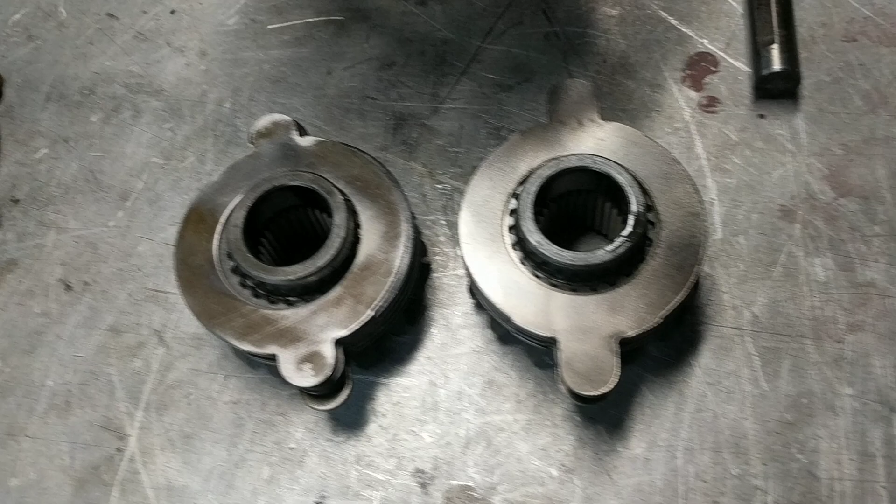Hey guys, I'm doing the 8.8 Traction-Lok for the LTD LX, so I thought I'd show you what I was up to when I first put it together.

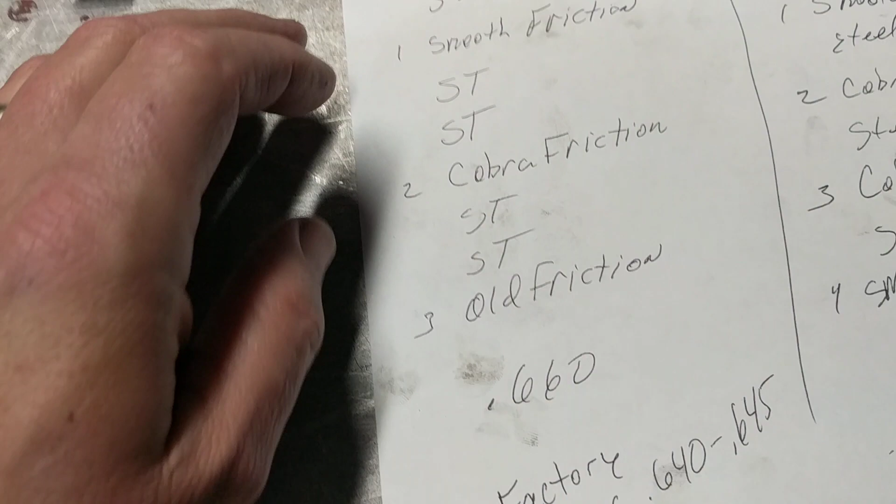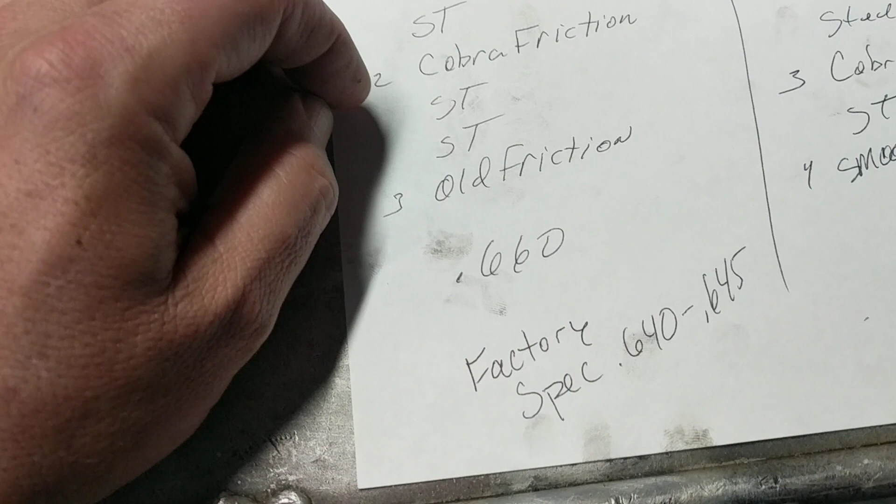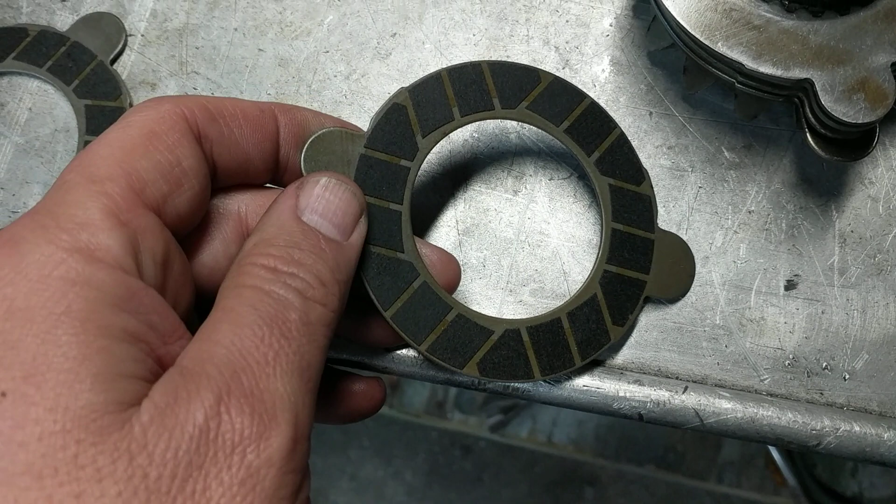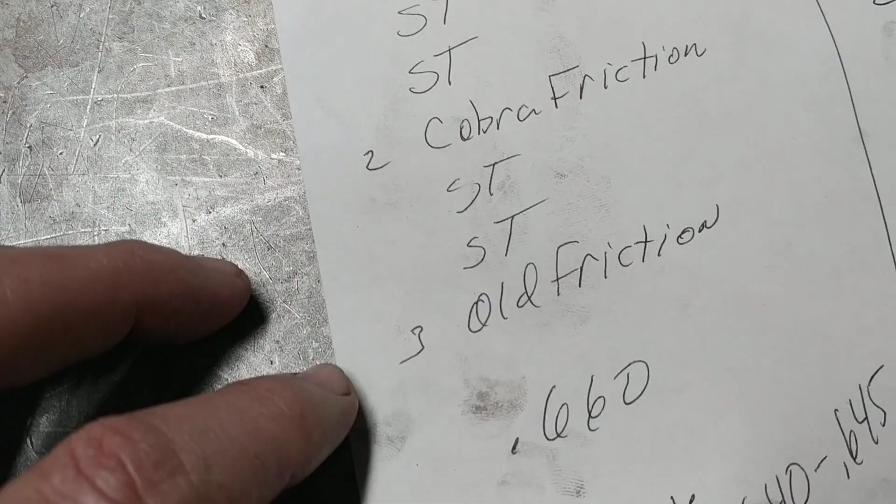I used what I guess is the factory setup, only it's modified. The factory one has got 3 frictions and 4 steels. We got rid of an extra steel and didn't have a shim, using a smooth friction, which is a regular friction plate with all the stuff taken off. Then we had a Cobra friction, an actual setup they called a Cobra Kevlar clutch pack. I've had these forever, sitting in a box, so I figured I'd use them. The other friction was an old friction, which has got a little material left on it, but it's smooth.

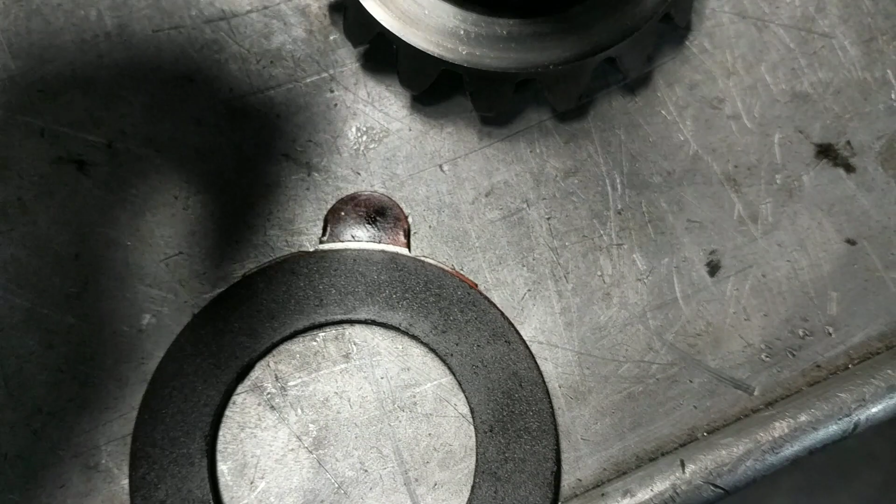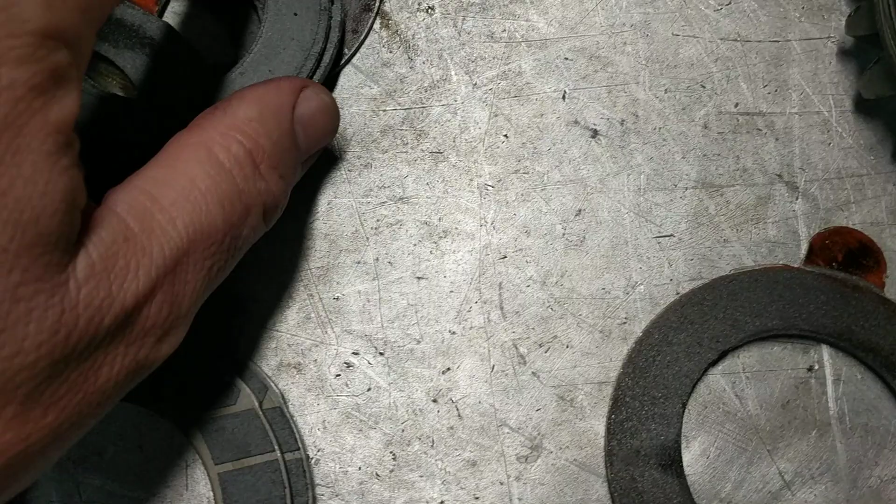I should point out too that if you're going to use one of these, the way they come from the factory, you see that lip right there? That's usually where it rides around the side gear, so it doesn't engage the whole thing. If you do use these, try to trim that off first, because once that wears down, you're gonna have some slop in your pack.

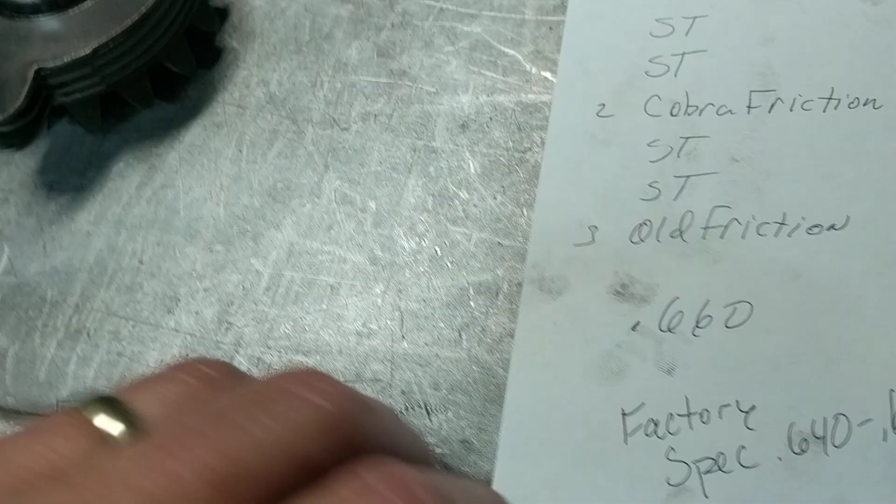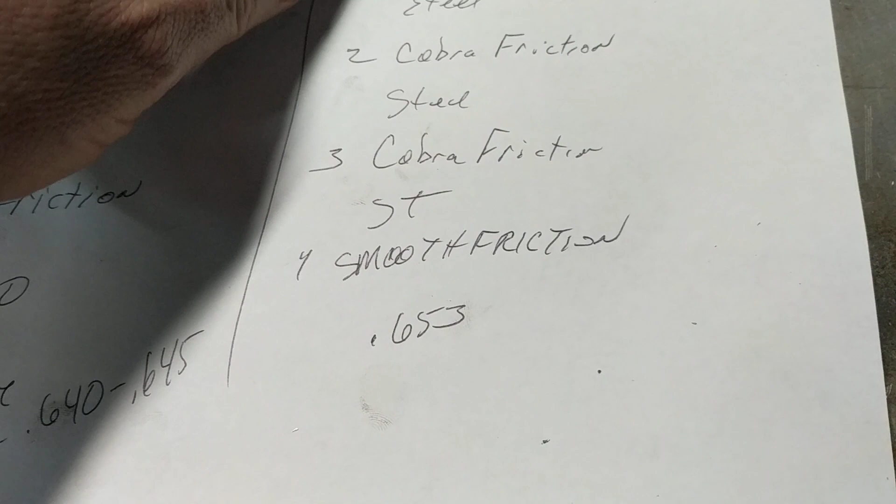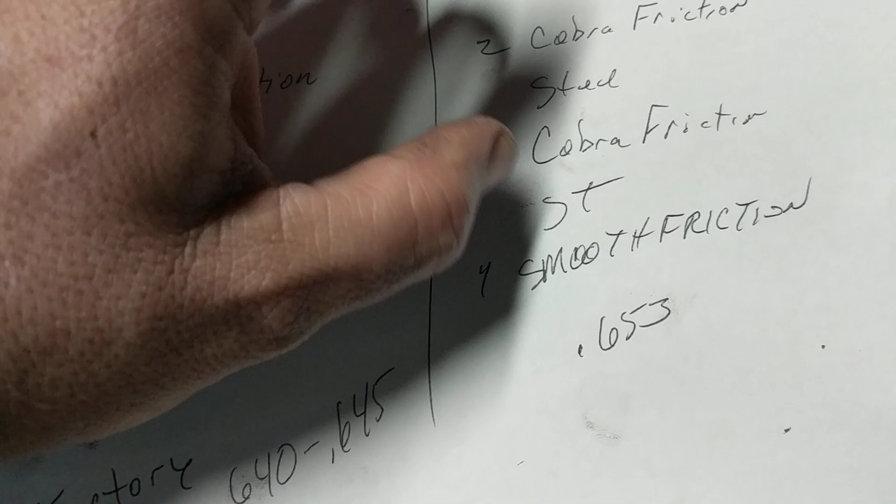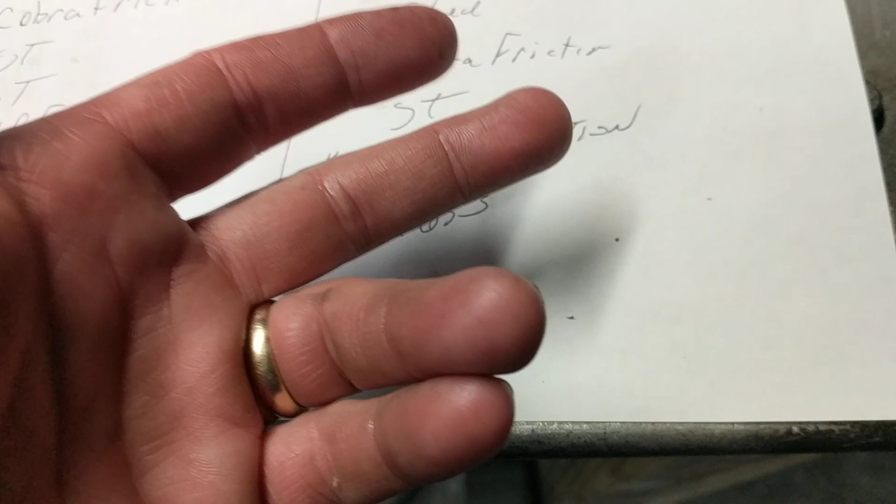This is a 28 spline carrier that came out of the whole rear end. I'm going to swap the whole works. Right now it's got a 410 gear with, I think, an Auburn differential and a C-clip eliminator axle setup. I'm going to take that out and save it for another car, maybe the Dugan. I'll replace the Auburn with an actual 31 spline to get rid of it, because it makes noise. I don't know, it sat for a while, and when I had the engine out it just doesn't work right. It makes a lot of racket going around corners, so I'm going to get rid of it.

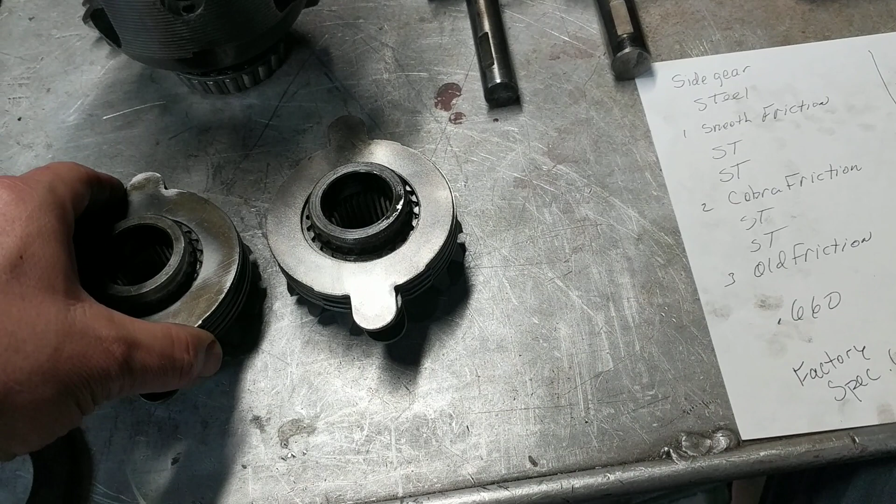And I've got the C-clip axles. Those are going to the LTD. I figured with the automatic it should be all right, not like hitting it with a stick and 6,000 RPM dumps on it. It should be fine, and I'm going to run that in there.

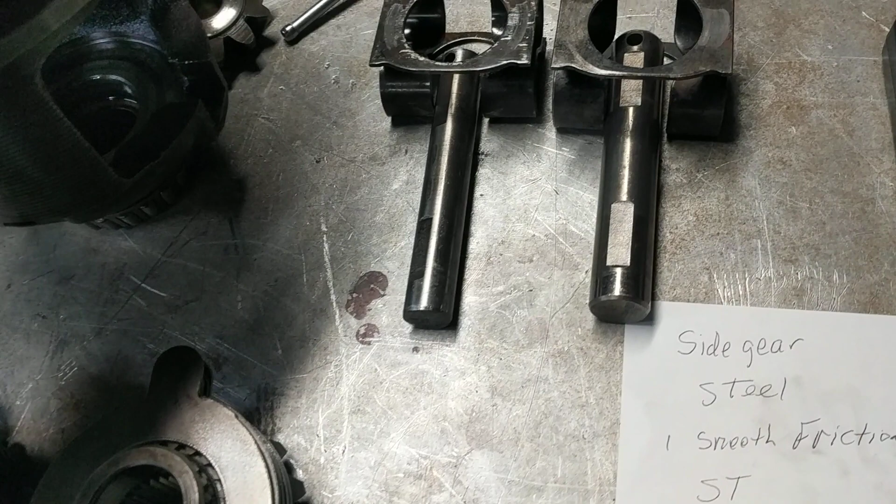I'm going to a 373 gear too, because it's already set up, and like I said, I have it. I looked at my old logs and didn't see a definitive number picked up when I put the 410s in on the LTD versus when it had the 373s before that. So we're just going to run with it.

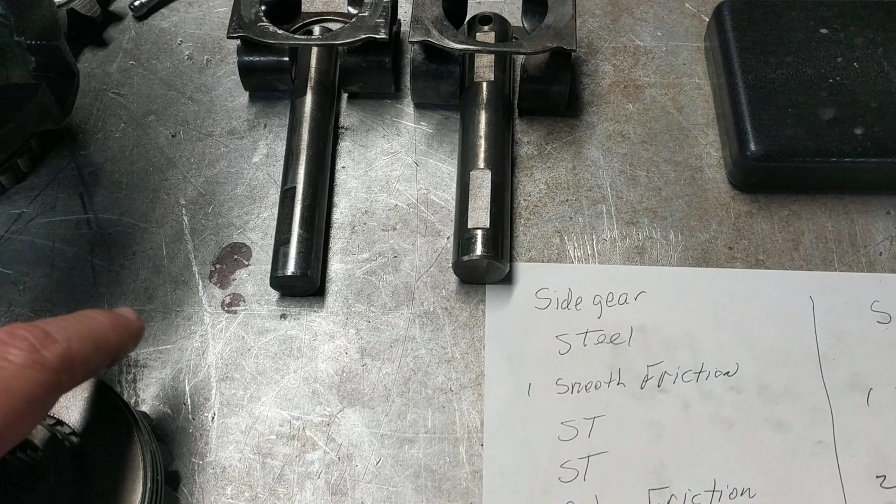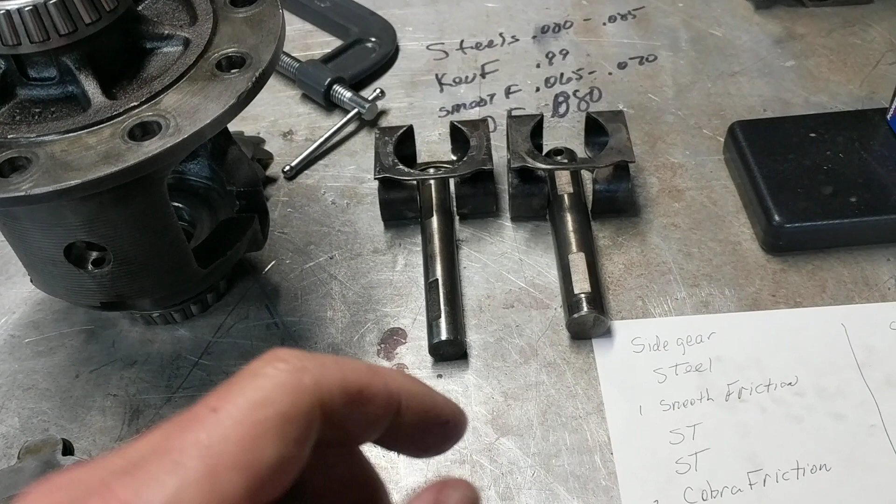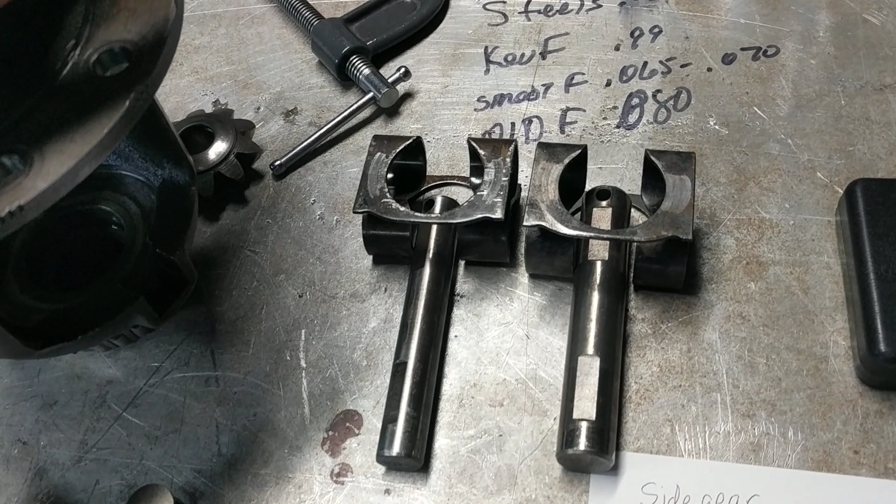The reason being, the computer that runs the transmission has a gear on the output shaft that's 23 tooth, and it's just not enough to get the right number for the transmission controller. So the shifts are off a little bit, and the speed number it shows is off, which is a little frustrating for me. I'll just deal with it. If it's a little slower, I'm all right with it. I'm not worried about setting records or being super fast. It's a driver more than a race car, so I'll be fine with it. Anything will be faster than before when I couldn't get the shifts down. I'll get the shifts dialed in, and it'll be a lot better, I think.

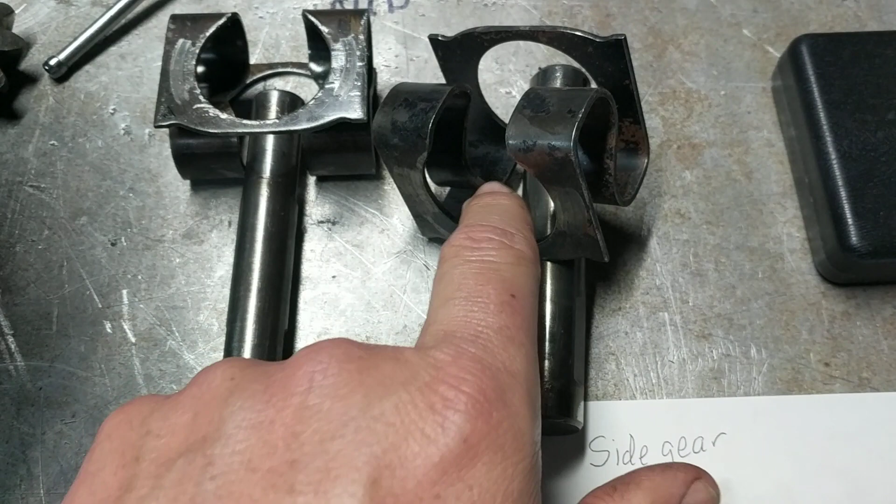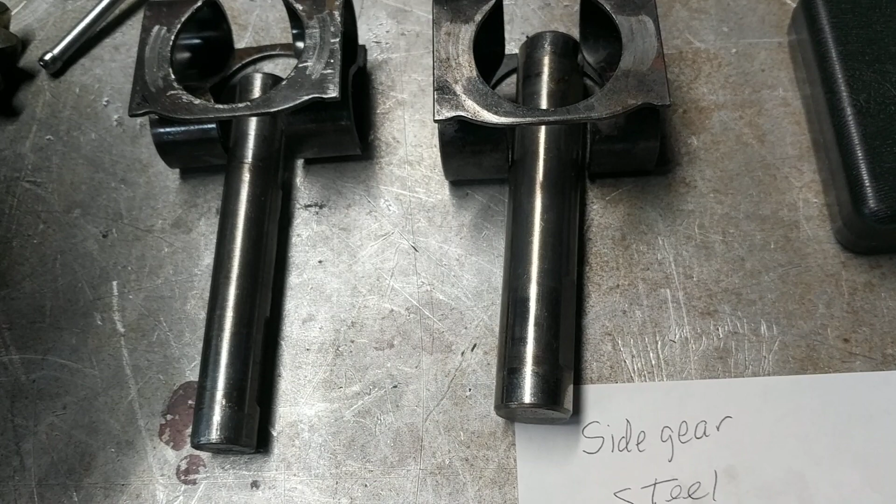Speaking of 31 spline and 28 spline differences, this is a Traction-Lok spring for a 31 spline, and this is for a 28 spline. You can see how much beefier the 31 spline is. The whole unit's a little more robust, supposed to be like 25 percent or higher stronger than a 28 spline. But like I said, in my instance, I should be fine with what I got.

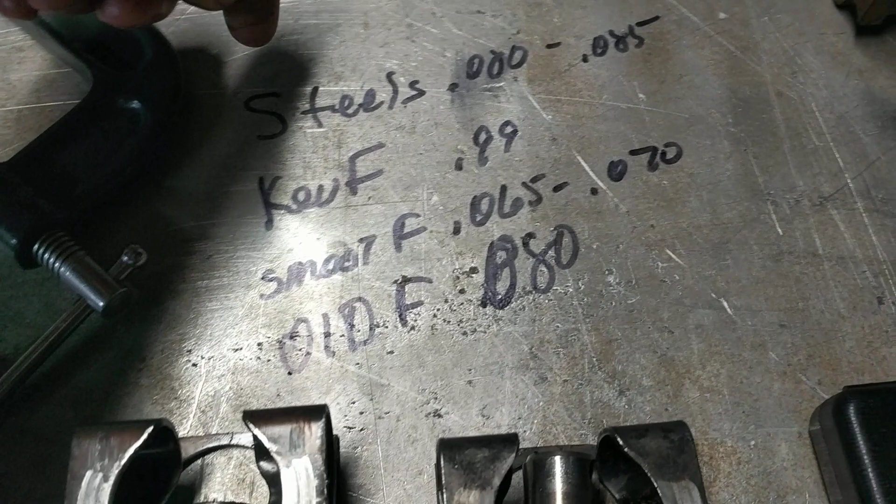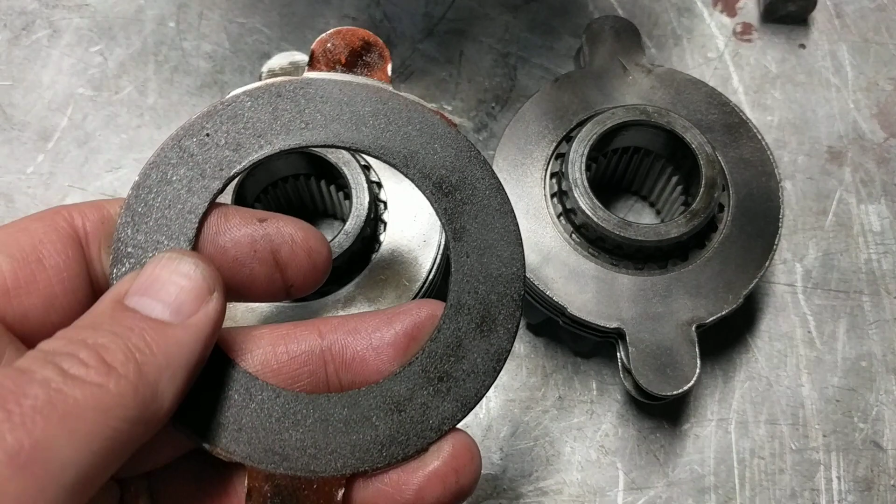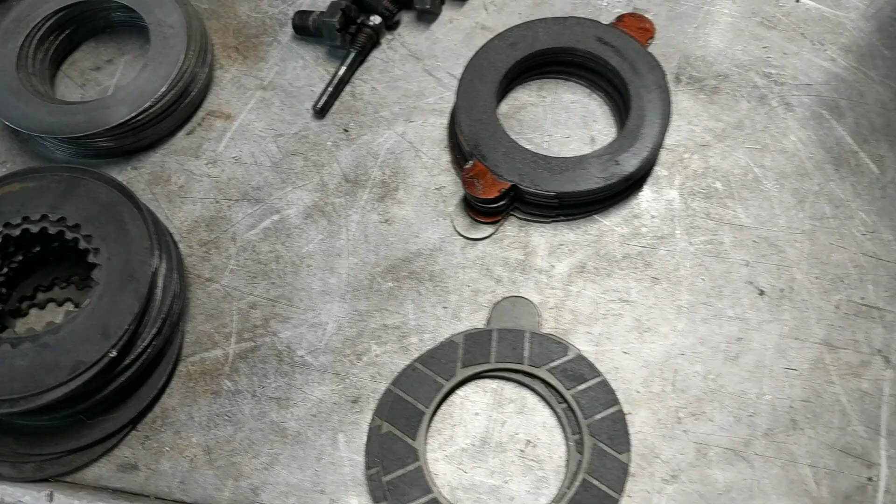For reference on the steels, they were 80 to 85 thousandths thick. The Kevlar frictions were 99. The smooth frictions were 65 to 70, and the old frictions were 80. So like I said, they still have some life left in them, I'll hang onto them, maybe put them in something else down the road. Same with the Cobras, I've got 2 left, I can use those for something down the road too. And I got a whole bunch of steels and a bunch of shims, so we can throw together all kinds of different combinations.

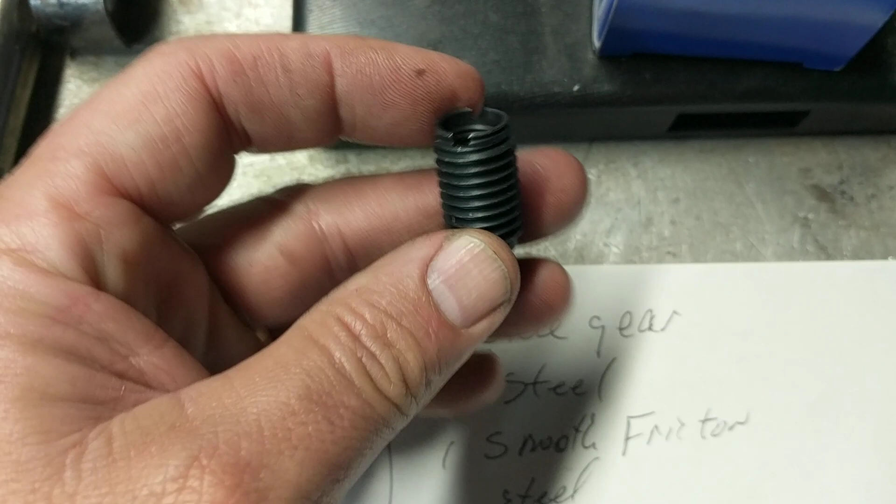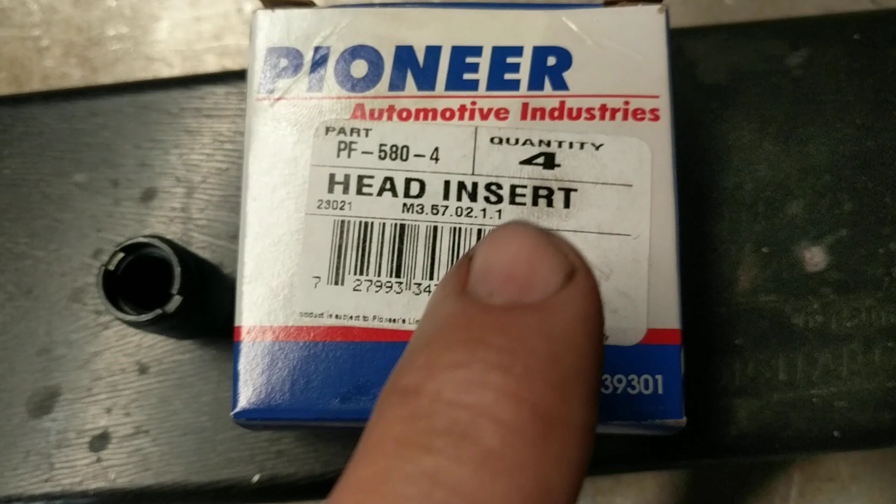One last thing here, this is a head insert, it's called. It's made by Pioneer. I got these through Summit, but O'Reilly's carries Pioneer. So if you want to get one from O'Reilly's instead of buying a whole box, you can get them by the number PF 580-4. So you can buy them singly, they're like $5. Just wanted to share that with y'all.